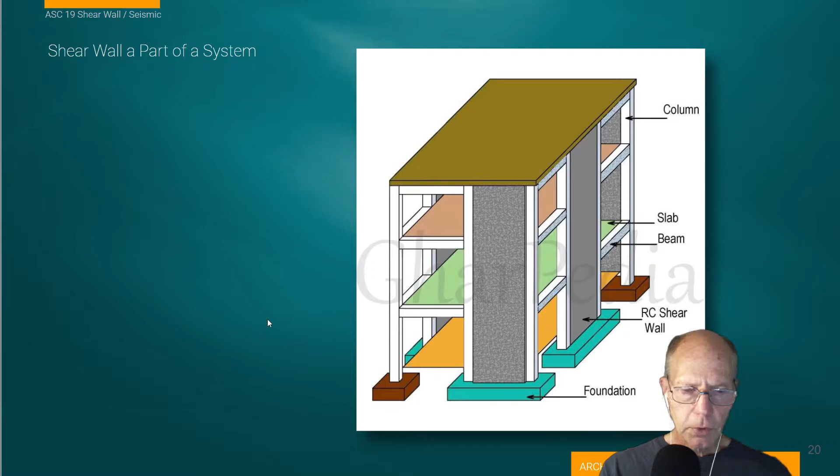And in the simplest way in wood framing, and I presented this before, but now to talk about it in kind of a review context, we have up here at the top a wood framed wall on a foundation system. Obviously nothing to support it from any kind of movement. So we put in our bolts to hold our sill in place.

I talked about these being 6 foot on center, but I think the code now has moved to 3 foot on center for these. So when you see these, we're not just holding the building to the foundation, but we're also trying to keep this building from sliding on the foundation in a reaction force to what is created by the shear wall, that stiff shear wall that shouldn't be doing any overturning because it's tied to the floor above it or tied to the floor deck below it. So movement prevented by bolts, movement prevented by plywood shear panels.

So in this case, you can see the assembly here where we have a wall framed once again with a floor deck this time on top of it. A load, could be a seismic load, could be a wind load, but we're looking for those loads to be resisted by the shear wall. And without the plywood diaphragm, the shear wall is not a shear wall. No bracing in it. The plywood provides that kind of bracing or diaphragm activity.

And notice once again, we have this idea of the nailing scheme, something that you would pay attention to if you were on site. Typically, we're talking about 4 and 6 inch spacings on the edges of the panels and on the seams. And then in the field, typically the center of the panel, that could be 6 or 12 inches, depending on the specifications. So we have the foundation, the connection of the wall to the foundation, the shear wall then to become a performative shear wall.

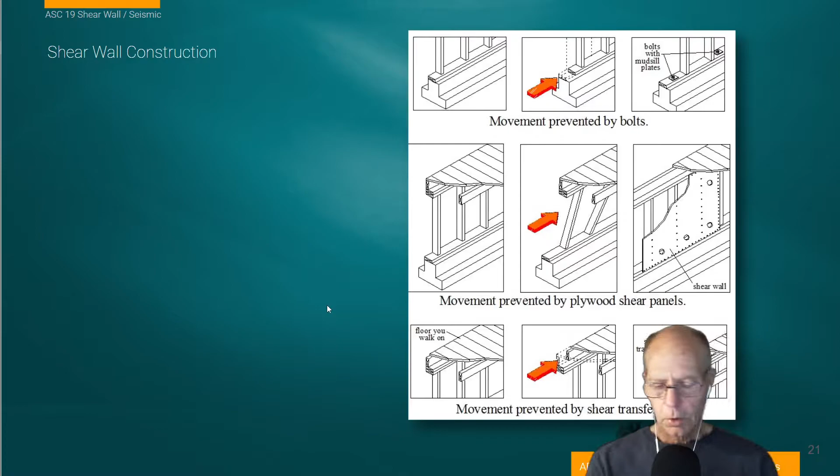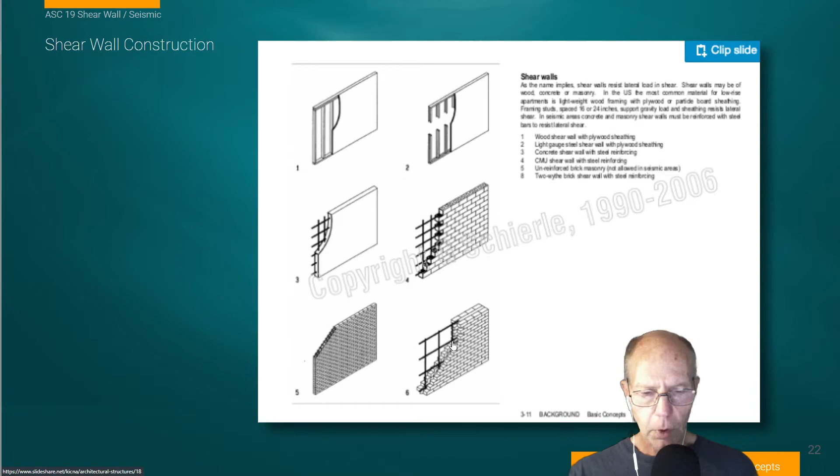5 would be a way you wouldn't make a seismic wall, unreinforced brick masonry, but a way to reinforce that or make it perform as a shear wall would be to have a width of space between 2 wythes of brick, and then fill that with rebar and concrete to create a shear wall type performing assembly.

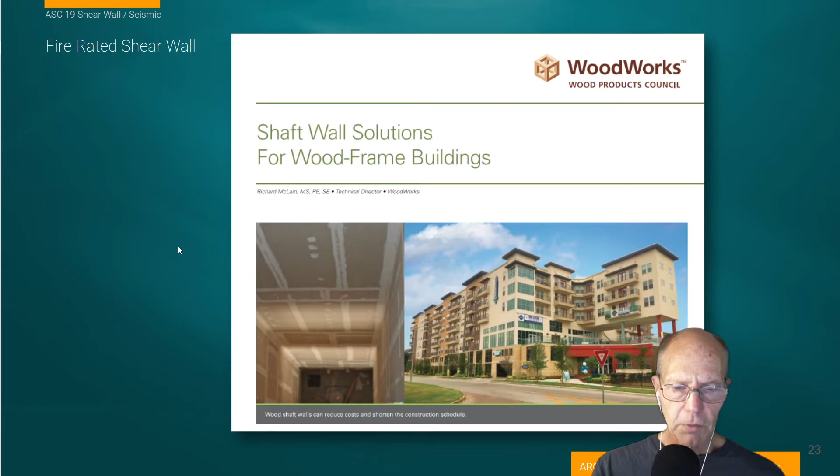And I probably should have put this right after we talked about the wood frame bracing. I just want to touch on this again. The idea we can make shaft walls out of something that isn't concrete. Why this comes up is if we're looking at reducing the carbon footprint, removing concrete from the building, we're going to need other solutions for that fire break or fire stop between spaces, especially on egress and elevator cavities, shaft walls. And so there are manufacturers like USG that make these specific types of shaft wall material.

Typically, I think it's 1 inch thick panels that are 2 foot by 8 foot. They're just monstrous panels, very heavy to move. But they come with a metal clip system that allows you to slide one panel into the next, fasten it up, and keep the fire rating for that whole assembly. And these have been extensively tested to make sure that they perform as needed.

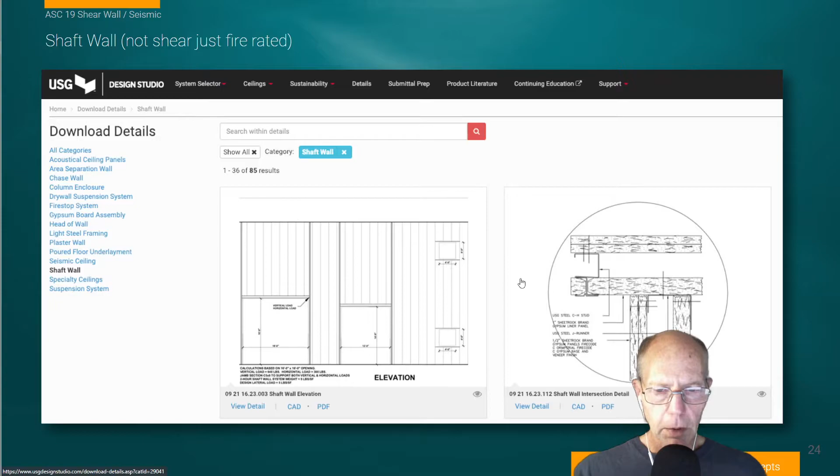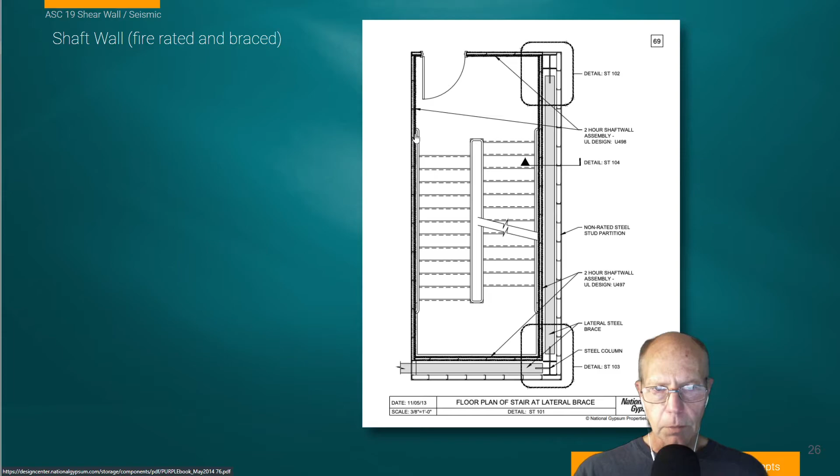And so this is many times an elevator shaft kind of application, but we can also do stair shaft wall construction. So here we have rated assemblies constructed out of gypsum wallboard to a UL standard, based on just the use of drywall and many times steel framing systems.

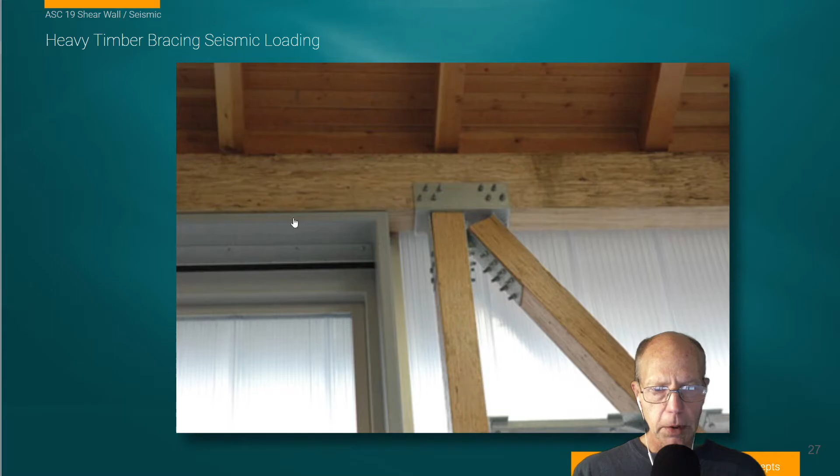A concept that's becoming popularized now is the idea of building resilience in general. Classically we understand building resilience as resilience to climate change and environmental effects, but here it's to make a building seismically resilient. In California, if all buildings are exposed to an earthquake and they're all damaged and need to be rebuilt, it's a colossal failure. Even though the building doesn't fall down, many times there is internal structural damage to the building.

And classically, our design for seismic retrofit in the building is to keep the building from falling over during an earthquake and killing its occupants. It isn't really to make sure that the building continues on in its normal life. So this is an emerging kind of science and discussion, this idea of seismic resilience. And a lot of times, and I think this will go to the hyperlink of it,

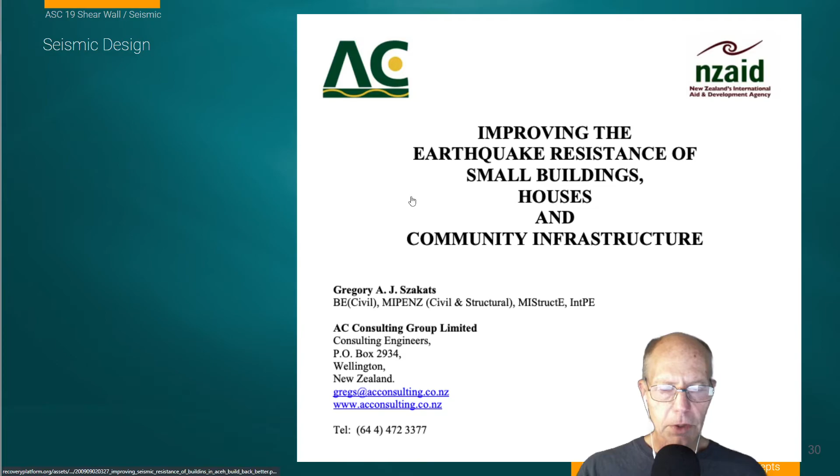So a couple of other links; there are just tons of links to the idea of buildings and seismic resistance. And then I just wanted to touch on this idea of the moment frame. Obviously another way, I think we've learned and discussed this in class, you can have a steel braced frame to create shear wall performance. This could be a structural retrofit or for a seismic issue. But we may need openings.

And this is just a reminder that a lot of what we'll see in these seismic retrofits become design aesthetics for the building. And so it's an opportunity for us to create really better visual solutions while still maintaining the engineering requirements of creating a high-performing earthquake-resistant building.

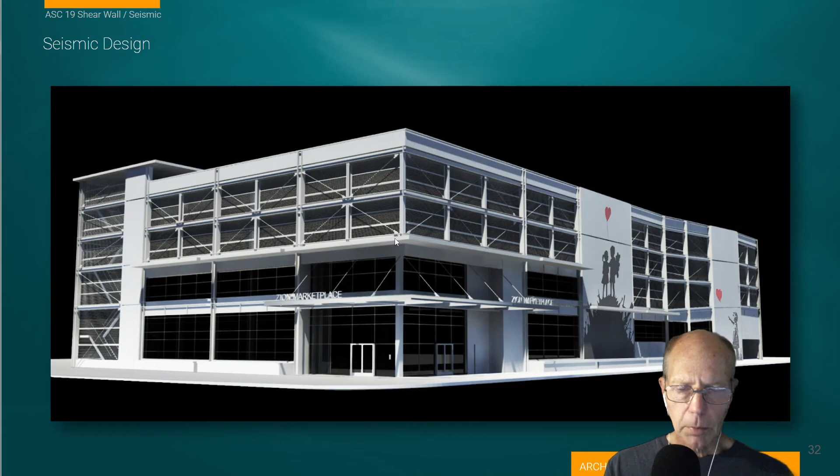Just a couple of parting graphics here. This is a metal frame building. I didn't talk on the idea of soft stories. I would like to include that probably in another presentation. I'll try to remember that.

But here we have a metal frame building, and something that you can start to recognize now when you see something like this on a site is this X-bracing here. These are laid over the steel studs in order to create that shear wall kind of stiffness, probably importantly done on this building because it'll probably not be clad in plywood, but in a fiber reinforced gypsum wallboard material.

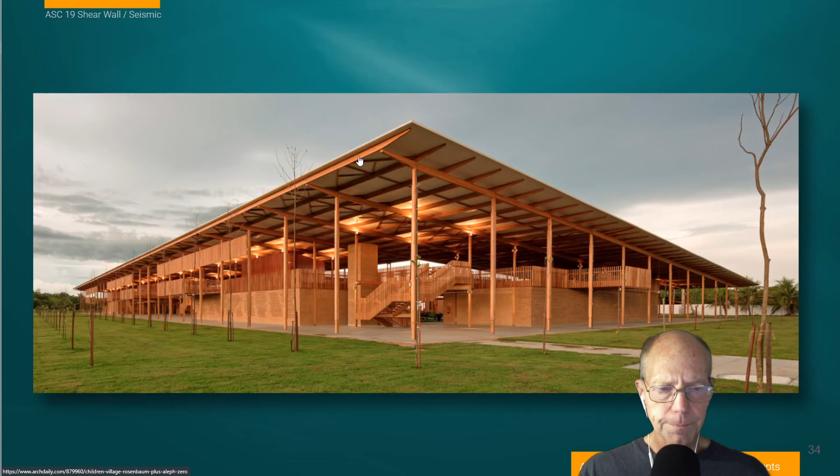And then that idea of the challenge, this is the last vision. I was thinking about where is the shear wall performance in this roof plane here, and what's happening to keep this whole assembly upright like this. And I don't have all the answers for it, but this would be something to bear a lot of consideration when you're designing this now.

I think without thinking about shear wall performance, without thinking about earthquakes, we would probably gloss over the fact that there doesn't appear to be hardly any kind of shear wall resistance at all within this assembly. The only place I can see maybe an indication of that is this tie-off of the floor deck here. Maybe this is a floor diaphragm connecting at enough points that this floor deck has enough shear wall performance to keep this supported during wind loads.